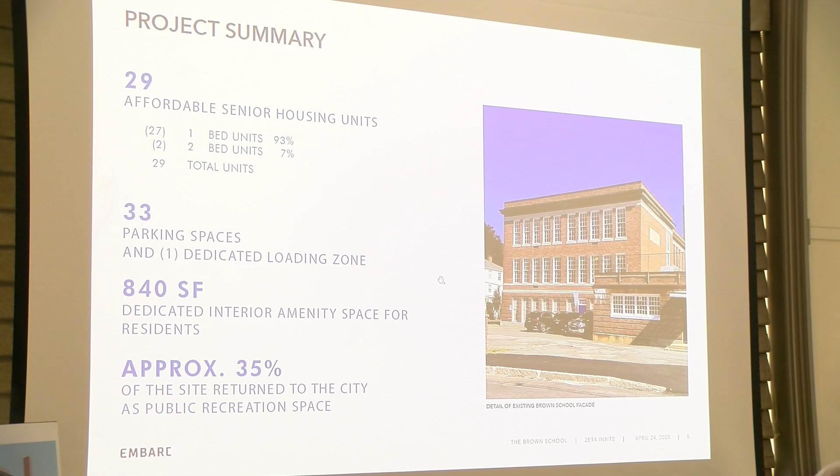So what we've done since January, you can go to the next slide. We're still at the Brown School. We still have 29 units of affordable housing, but what's changed is that we measured the building and we found that the building is smaller. So the unit mix is a little different. It's primarily one beds as opposed to the many two beds that we had in our initial proposal.

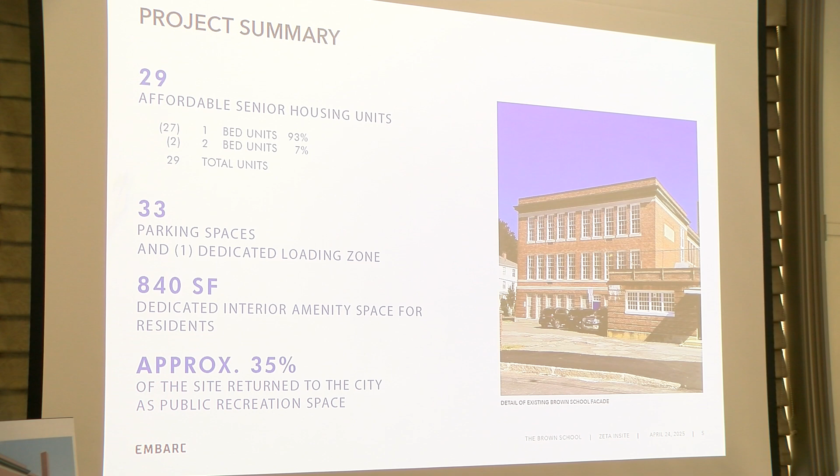And we're still providing the parking ratio that we heard loud and clear was really critical, one space per unit and a few extra. And we're still working very closely with Andy and the planning department to make sure that the site as a whole is an enhancement to the community, because it's sort of a puzzle and a sea of asphalt that really needed to be rethought. The existing amenities, the Article 97 elements, were sort of underutilized.

Parking was a bit of a mess. So since then, we've really kind of taken a big picture look and refined all of those elements. But in terms of what everybody is probably wondering, like, why does it take these guys so long? Well, I wanted to take a minute or two to walk you through what we're going

through. So we have to, first of all, comply with historic tax credit syndication guidelines through the National Park Service and through Mass Historic. We submitted applications for those tax credits, and the good news is we got approved in record time, which means that hopefully we'll get some allocations this year. Historic tax credits are allocated on a quarterly basis, so they have to be accrued. And that drives the timeline, because until we've accrued 60%, the Executive Office of Housing and Livable Communities will not fund our project.

So when you think about when are these guys going to start, it's still a couple of years out, and it's a sliding process a little bit. But the great news is that we're already seeing some really positive feedback, and everything is heading in the right direction. Also, since we met with you, the Affordable Housing Trust allocated $450,000 in support of the project, which is critical because for us to syndicate this through the Low-Income Housing Tax Credit Program, that program requires a local match. And that puts us in a very good position to show that the city supports this project.

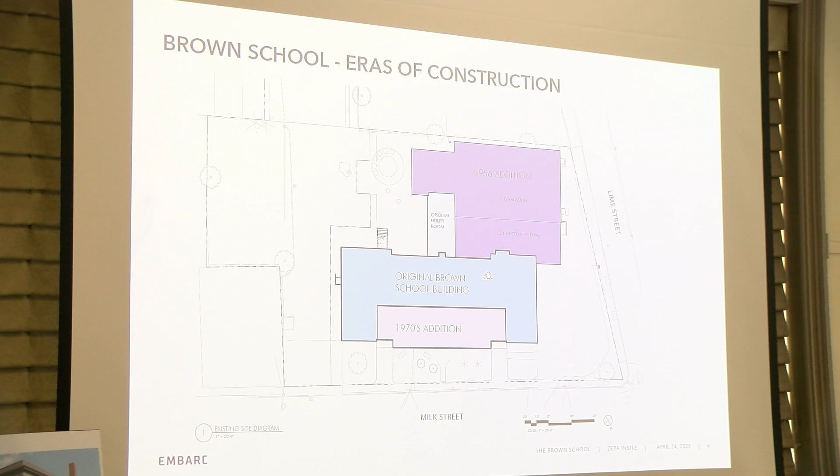And I'm Dan Briggs with Embarc. We're the architects on the project, so excited to take you through some of the details of what we've been working on. I'm going to quickly breeze through the next few slides, but this really just goes through the different eras that the school was constructed in. So really, we're focusing on the original Brown School building from 1924, as well as the 1970s addition. And we're working with the city to remove the 1956 addition and that connector piece here.

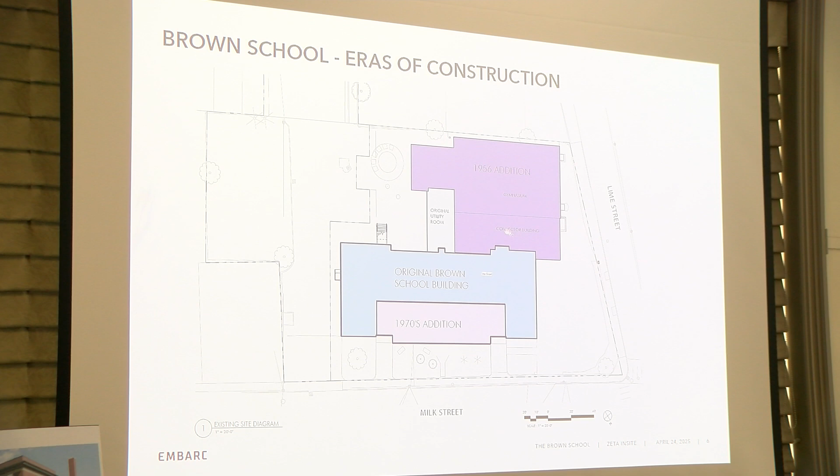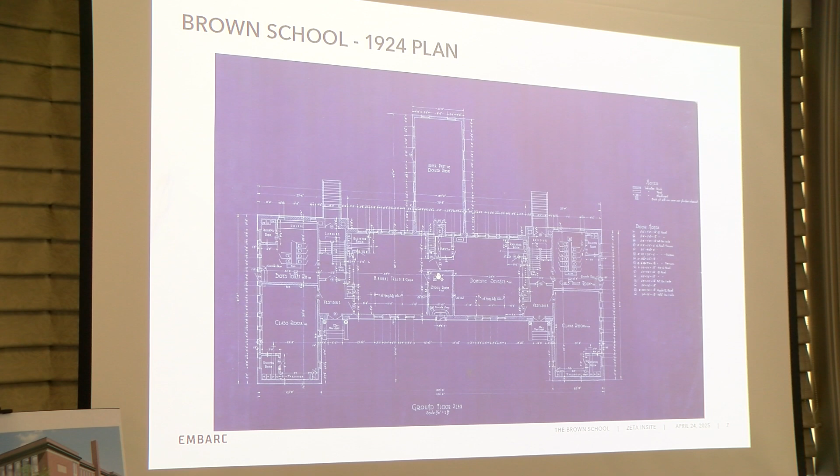As I mentioned, we have a wealth of great historic information and plans, both from the city of Newburyport as well as from PAL, our historic consultant, that really helped give us a great idea of the different pieces and components of the building. So this is the 1924, the 1956, '74, and now continuing forward into this next era, we've been working collaboratively with the city on the demolition part, making sure that everything that happens jives with our final building product.

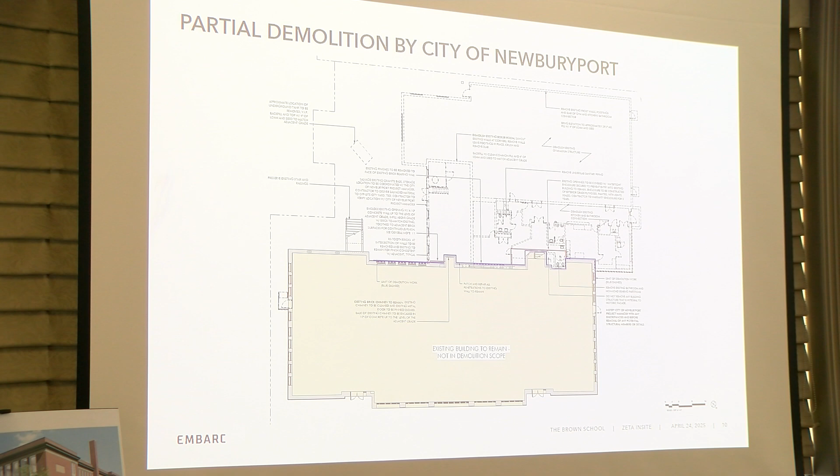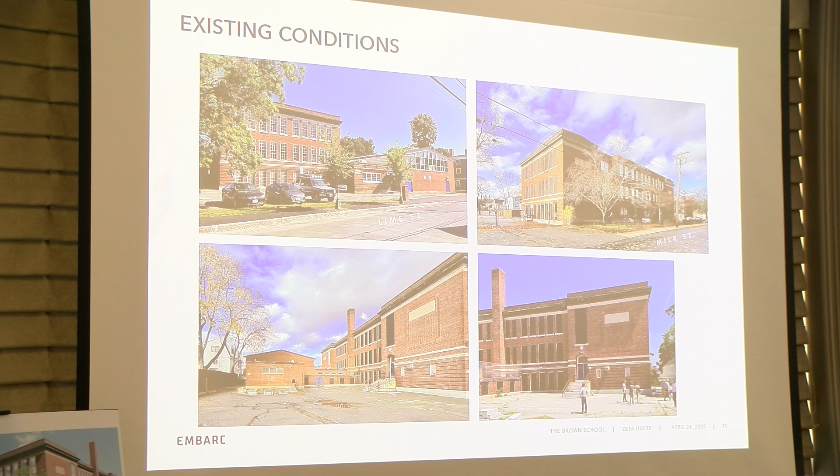You can see also just the extent of asphalt in some of these areas of the rear of the site and the sides, and a really exciting opportunity to bring some green back to the project as well. And some of the existing windows from 1974 that we're replacing on that side.

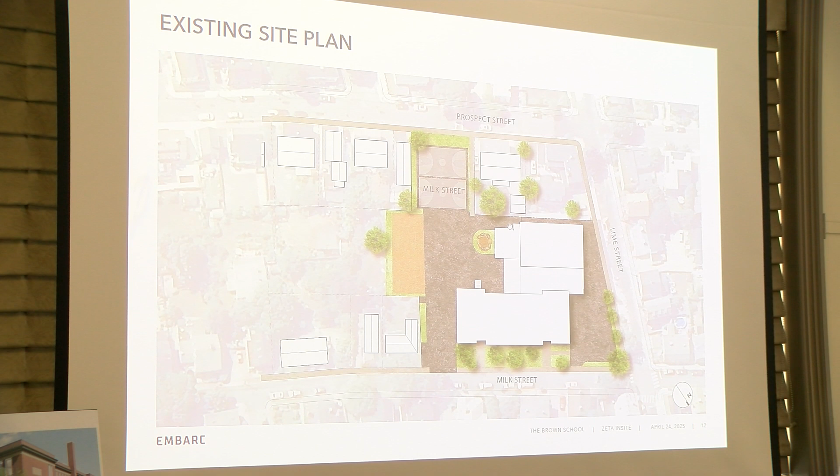So as Zena mentioned, the existing site plan is really a lot of asphalt and a lot of different curb cuts, and sort of these two isolated play areas at the back of the site. So it's just an amazing opportunity for this neighborhood especially. And we're really excited to bring this to life.

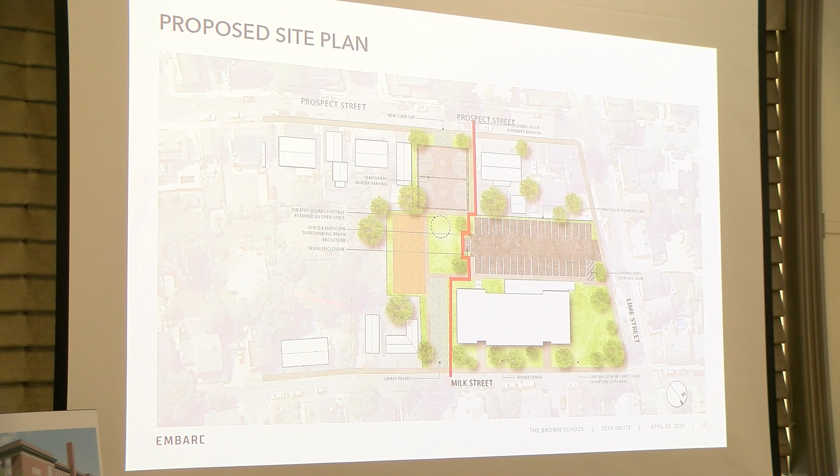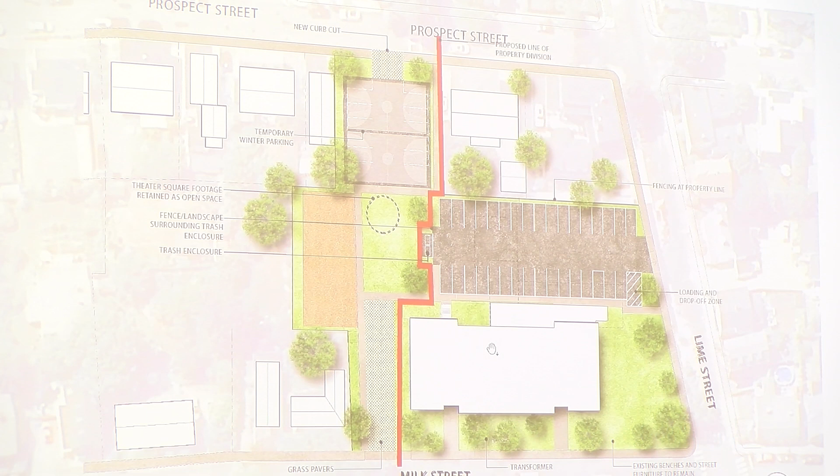Obviously, as I'm sure has been discussed, giving back this section of the site to the city, greening that up, creating a lot more connectivity through sidewalk connections and those green pathways, really consolidating the different curb cuts on the site so it's much more organized. There's one clear entrance and exit off of Lime Street, and bringing in a lot of new landscaping throughout the site, especially at this corner of Lime Street and Milk Street. Here, really surrounding the building with greenery.

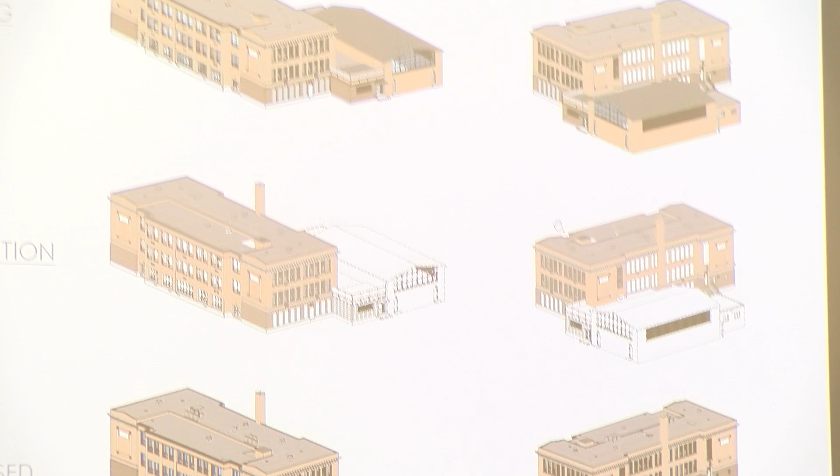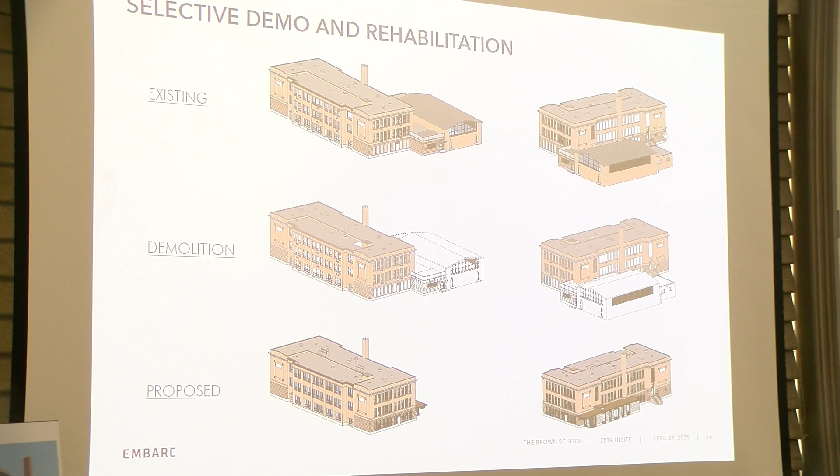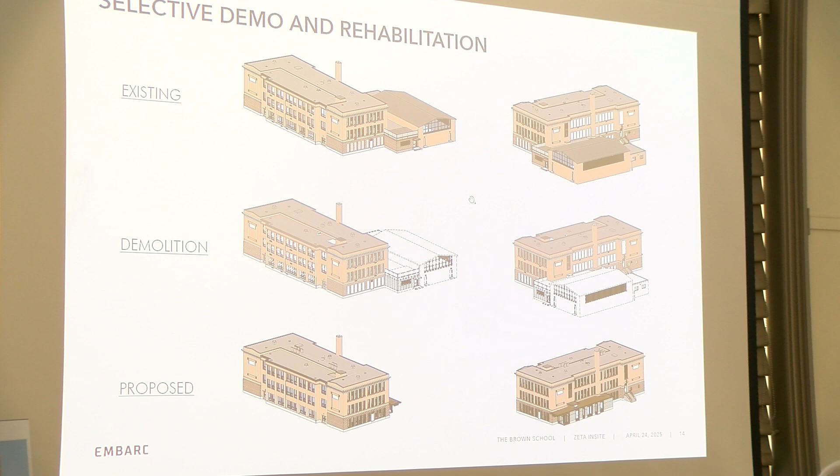This is a three-dimensional series of drawings that show from two angles the existing, what we're planning for that demolition process, and then what that proposed building will be. So as you can see at the top, the gym and the connector piece, as well as the boiler room here, and then the removal of that section, and really recreating a new entrance off of the back side along Lime on the side. We'll show you more images of that with some context to help locate it.

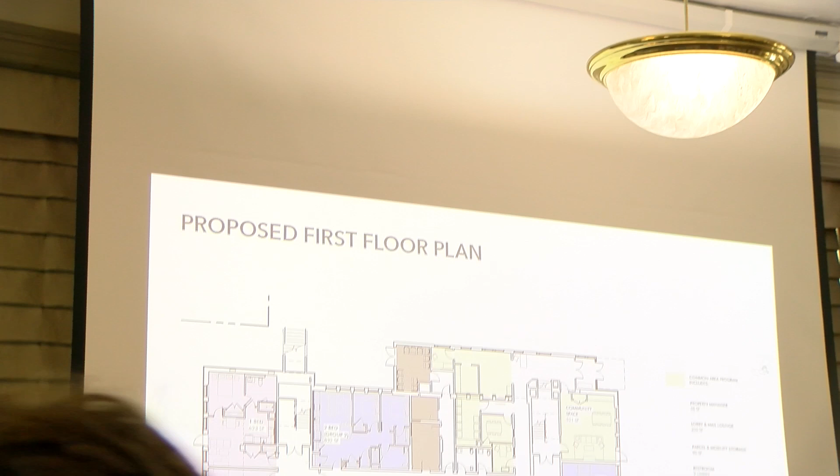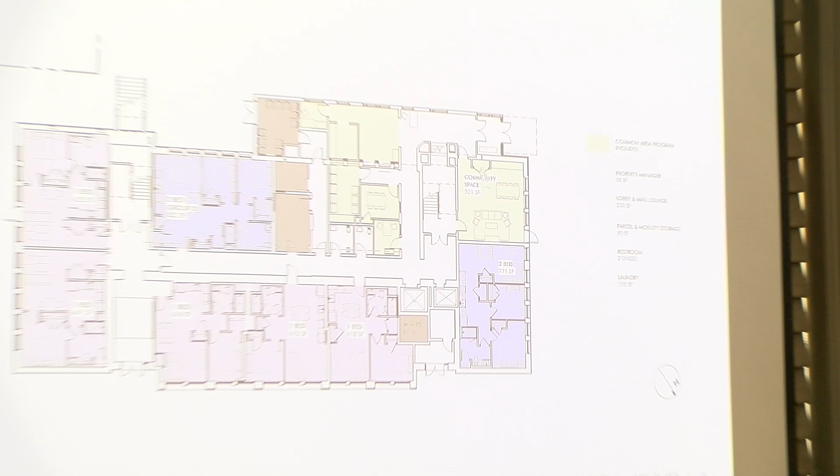Just going through the building plans quickly. So the proposed first floor plan shows this new connection that we're creating that corresponds to Lime Street. It creates a new accessible entry to the project and gives us a chance to create some amenity spaces as well and management and leasing areas. So everything in this kind of tan color that you see here would be those amenity and support programs for the building, really clustering those around the entry, trying to create a variety of different community spaces and spaces that residents can use. And utilizing the old area of the boiler room for where our utilities and sort of back of house components will go.

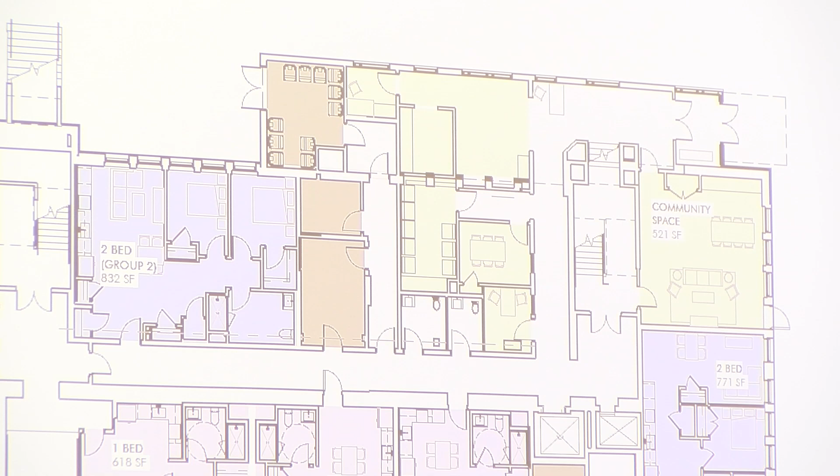And throughout the building, really, our intention for the actual units themselves is to recreate as many of the old classroom spaces as we can to maintain those, and to sort of maintain the character of those spaces throughout the building to the greatest extent that we can.

So moving up to the second floor, this is really identical to the third floor. You can see again here, just trying to maintain a lot of these existing partition walls, like that is the space of an existing classroom that we're maintaining. The idea is that you enter the unit and you can still get the sense of what that space looked like when it was a classroom, same ceiling heights, same window widths, a lot of the same appearance and the same flooring, things like that. And as Cindy mentioned, we have 27 one-bedroom units and two two-bedroom units for a total of 29 units in the project.

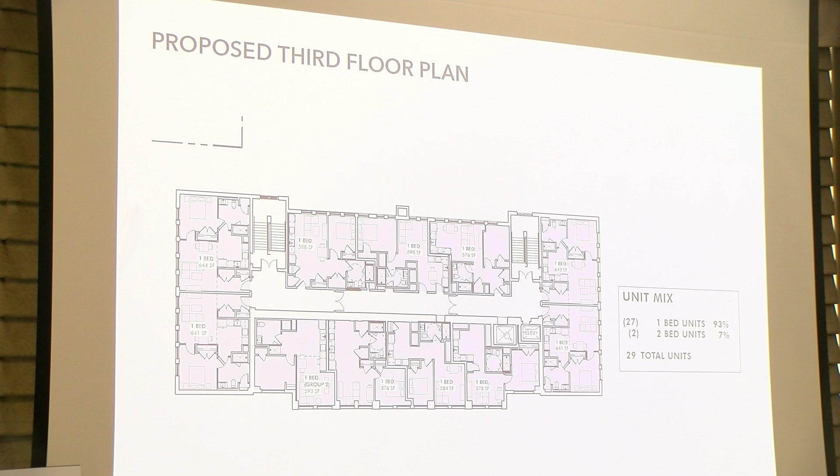And again, the third floor is the same. We have two elevators, so we are actually adding an elevator to the project. It's a great component for the demographic. It's also a requirement of a lot of the funding that we're receiving.

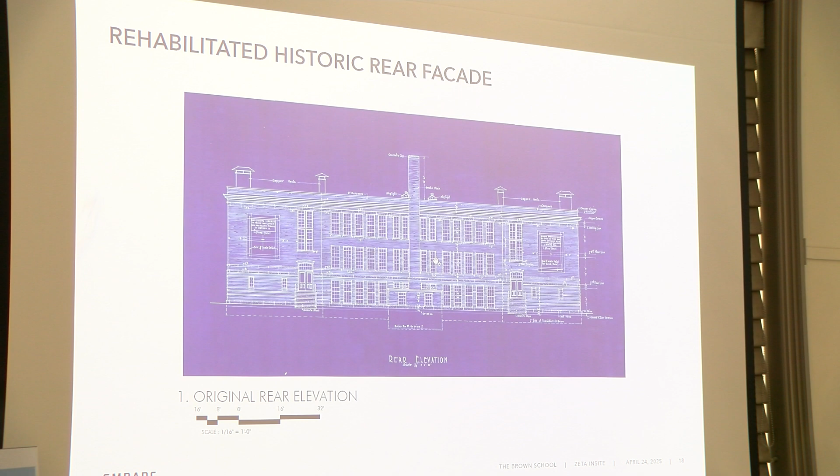This is a really exciting series of slides that is really looking at that rear facade of the Brown School. This is from the 1924 drawing set, the original hand-drawn blueprints. And all of them are really immaculate facades. And the ability to really bring visibility back to this for neighbors and for the neighborhood. So this is what it looks like now with the gymnasium and the connector piece. And this is where we'd like to really be able to open that up and create those views where you can experience again the historic facade of the Brown School.

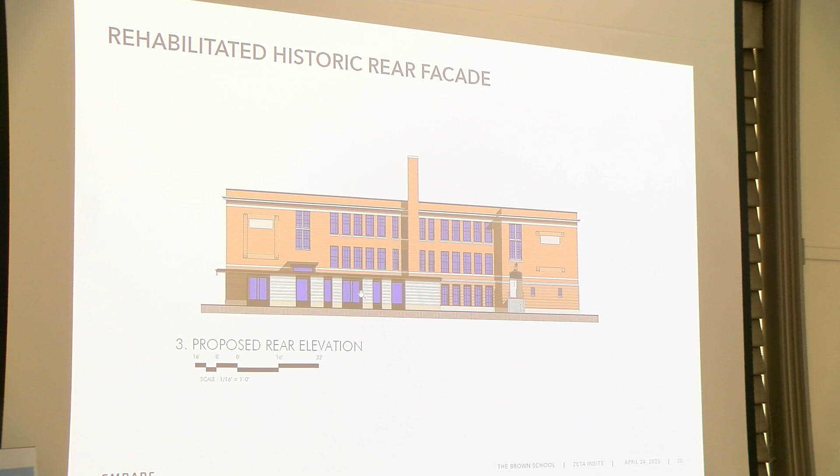And then working through architecturally, we've designed a contemporary style of addition there that's meant to tie in with that existing base. You can see all these lines, we're really trying to tie that in aesthetically to the existing building, but not to try to compete with it or pretend that it was original, but to show that it is clearly an addition to the building.

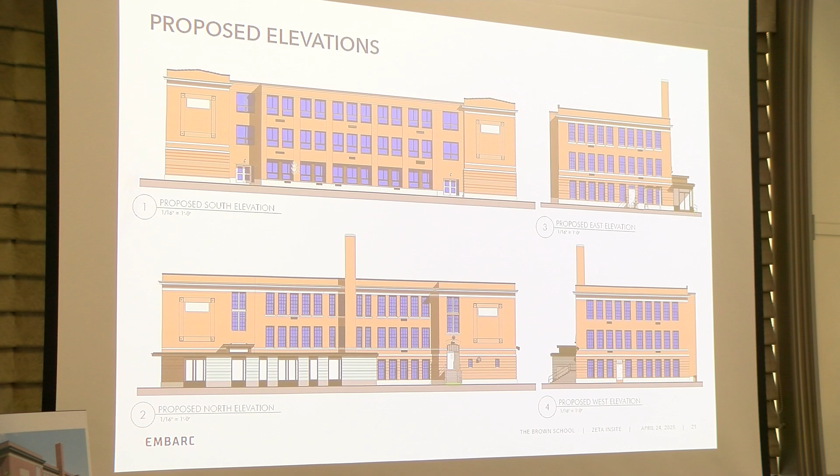So again, looking at all of the elevations here, really excited to see this building with those windows open. And on the Mill Street side, redoing the windows there to have a better residential proportion, make them operable, just make them really conducive to apartment living.

We're paying a lot of attention to the existing features of the building. As Sana mentioned, there's a lot of stakeholders in the project. We have historic, we have the low-income tax credits, and we're working with all of those stakeholders to make sure that we can hit all of the requirements they have, but also to maintain as much of the historic character of the building, the inside and the outside, as I possibly can.

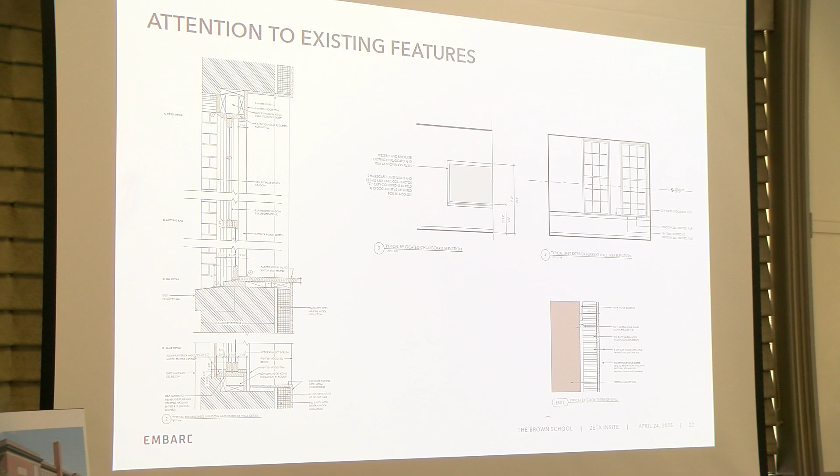And that includes preserving as many of the blackboards, the old historic chalkboards, that we can, and reintroducing them in living spaces in places where it's appropriate to have those within the classroom itself. Keeping a lot of the historic trim on the interior of the unit as well, and again, refurbishing those existing windows that are absolutely gorgeous.

Along with that, just to go back quickly if I can, we're also introducing new insulation to the building to help the thermal performance so that it's really comfortable year-round for all the residents and also reducing utility costs year-round.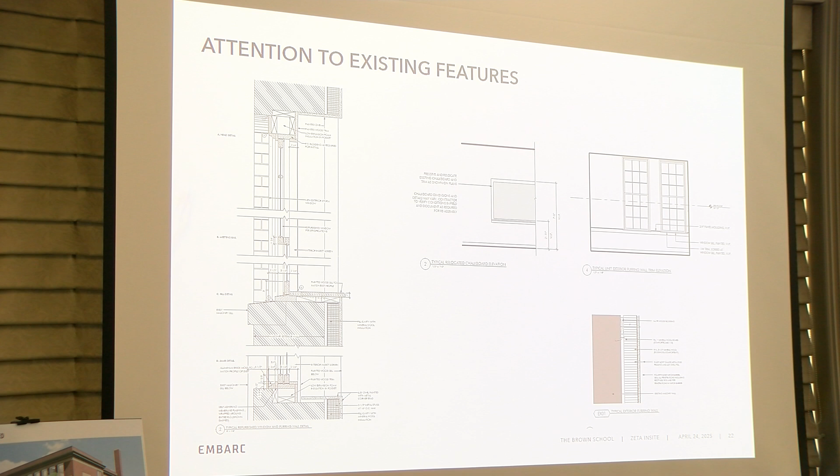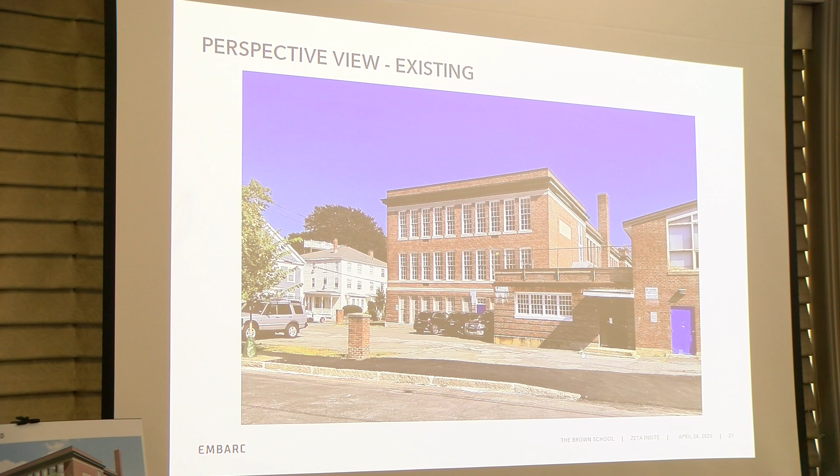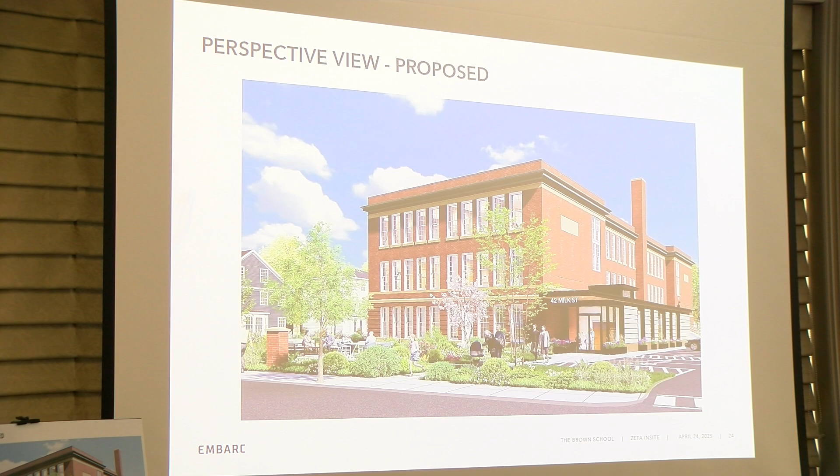So just a quick series looking at the building from Lime Street, so existing facade here, the gymnasium, and really excited about the ability to bring in new landscaping, new outdoor amenity spaces for residents, and to create that connective piece that sort of ties it all together. I'm just gonna jump in and say, absolutely. The entrance that Dan designed is really key because it offers a line of sight for anyone who is waiting for a ride. The parking allows for a spot for a minibus to pull in if we have shared rides to the grocery store or to the senior center.

So this was a really great way to pull a piece of the building out. It's sort of like a surgical operation where you take off the boiler room and the connector building where the kitchen used to be and then the gymnasium. But then you also bring this element that pulls it together because we do have to deal with a portion of the building that's missing.

And to Dan's credit, he thought about removing some of the existing base stones around the boiler room and reusing them, which we requested Andy, as he oversees the demolition, to preserve for us. But it really is, we don't make buildings like this anymore. A lot of this is really spending a lot of time taking care of what's already there and restoring it. And it can be quite elaborate.

Most of the windows are actually in good condition, so they are deemed reusable. But it's quite an extensive process to send them out and bring them back in. And they will be hard to operate. Some of the windows are being replaced, for example, on the 1975 addition on the other side, because we also need to have egress compliance. Yeah, there's an egress component to that, so making sure life safety is taken care of with the new window.

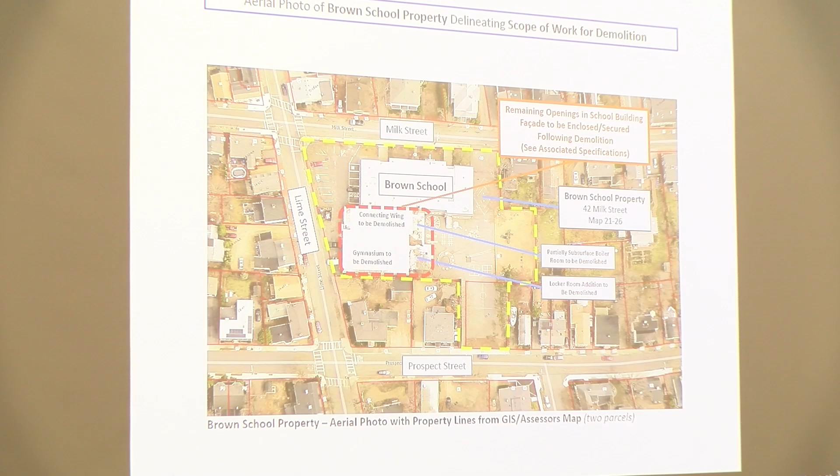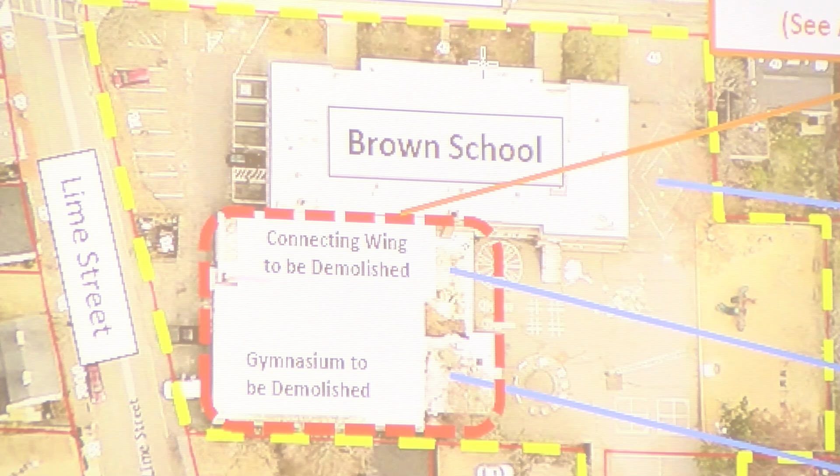I'm actually going to use my photo here. The Brown School building will be preserved, as they were just talking about. But all of this here, the gym and what I refer to as the interstitial space, and the boiler room, which is this piece right here, and then the locker room area, all of that will be demolished.

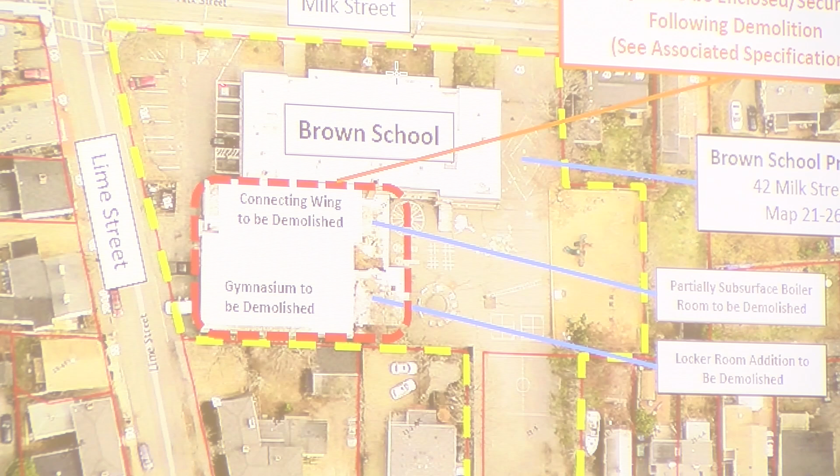There is a close proximity here, so I've already been talking with some of the abutters here, and we'll continue that discussion as we get closer to the construction. There'll be some good coordination along the fence line and tree line there to protect all that. The parking area here will be displaced temporarily. During the construction, we need to give the contractor good access.

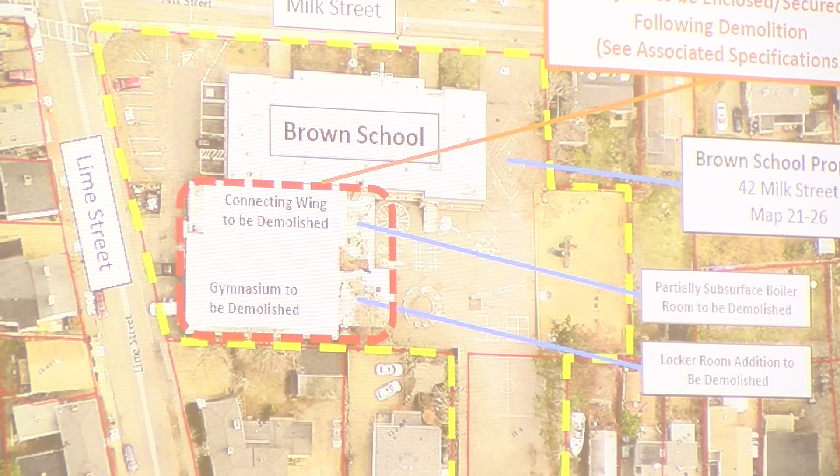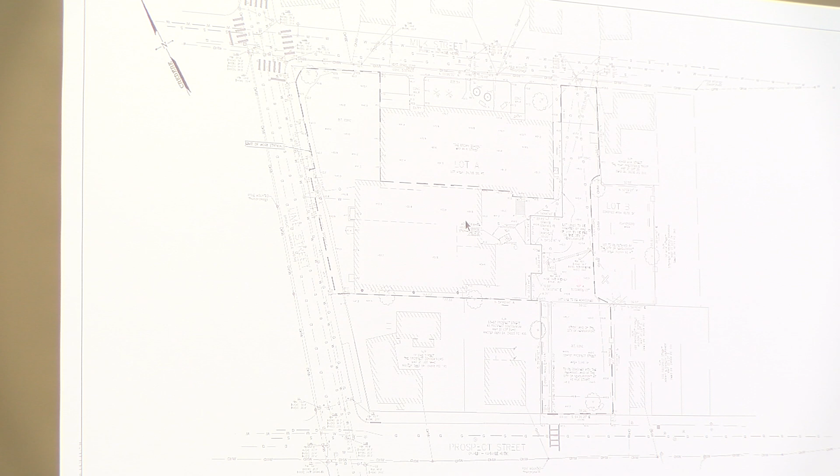These next three drawings are just from the construction set that we've given to the contractors. They have a whole bunch of specifications they have to follow, but just to give you an idea, this is the existing site, so the overall parcel, including the two that the city owns here, the original school building, and then the addition pieces that we're demolishing.

The piece that we're retaining, the park piece that I mentioned, the Parks Commission is looking a little bit further into in terms of future improvements. We're looking to align that with the developer's work for the school building. Because they are going to need access and we're going to need access, to make sure that we're not disturbing things once we put them in, it makes sense that we tie those things together and coordinate them.

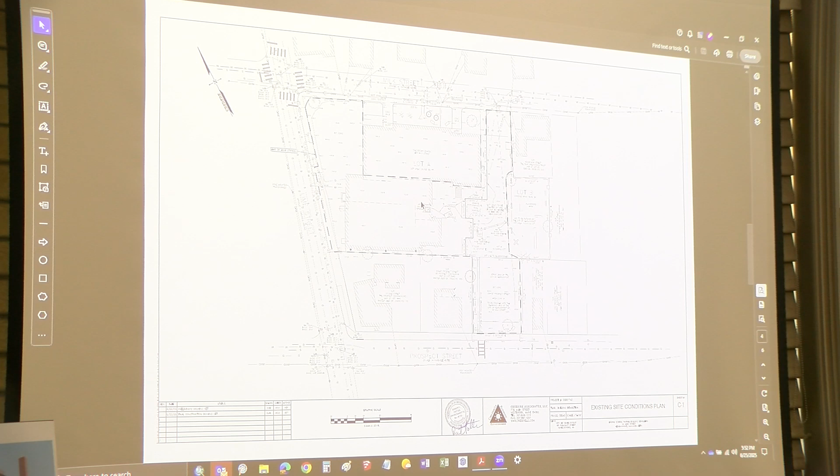So any improvements to that area following this work are not the subject of this presentation, but there will be some improvements to this area, including that asphalt area back there, the playground and the courts. But for now, the contractor will need access to those areas. So they will be establishing construction fencing around the outside of the site. As you can see here, they'll be making sure that these gates are closed as they're coming in here and getting access on the back as well.

They'll be protecting the staircase to the original school building. And then basically in this area here, they'll do some patchwork of asphalt. They'll be stubbing utilities before the work starts. We don't know the exact timing of this work, just to clarify. July 10th, the bids are due from contractors, so we'll be seeing after that, hopefully get good prices,

and enter into a contract. I think a realistic timeline for this, based on the things we usually see, including contract execution, exchanging insurance documents, seeing things we call submittals, and getting them mobilized out there, is probably an August, September timeframe. We can update our project page on the website, and give you a better idea once we know who the contractor is and we've talked with them about those details.

But generally speaking, they will be closing out those utilities. They won't really be doing work on the original school building, except on the backside, where, as Dan mentioned, we're trying to protect as much of that building as possible. So in essence, they'll be required to follow certain specifications to close openings in the building and weatherproof them for any duration of time in between, until the team here comes back and does the work on the original windows and openings on the original school building.

So they will have access to the entire site in that area. When they are finished, we will have them leave a chain link fence around this area here. There'll be some additional work and probably some further investigation we'll do for stormwater management and the future parking area and whatnot, working with Zeta and Mark and their team.

But we will close off this area here just for clarity and security of that area. This will be loamed and seeded, so just grass essentially placed in here. The parking area will reopen, and we'll be able to reopen this area as well. There'll be a little bit of restoration work here. Again, this will not be the future park condition, but the contractor's restoration to previous condition, essentially asphalt when they do. And we'll coordinate on the park side any sort of improvements, of course.

But what they will do also is leave a fence along that line as well. So again, the primary impacts that we're going to be seeing is when they're putting up the construction fencing, we'll have to close off those areas, and so anybody who's parking in that area will be temporarily displaced. That will open up again when we're done. We're talking about a matter of weeks, so probably like a 6-week period. We're going to try to compact this with the contract. It'll be a matter of details with them, but generally speaking, they will be the front part of that.

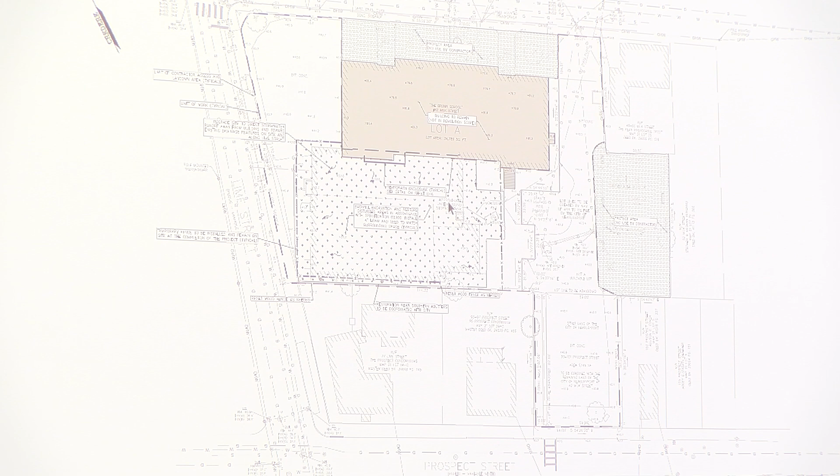You will see them come to the site, but they'll probably be doing most of their work inside, and that's because they have to do the hazmat remediation. So things like removal of a little bit of lead in the building, a little bit of the PCBs caulking around windows, and primarily things like asbestos tiles or wrapping around the pipes. Most of that is going to be found in the boiler room area. And so what we'll actually see when they get out there is their initial time frame, and a lot of work actually will be just taking care of and cleaning up all that stuff, getting it ready to go.

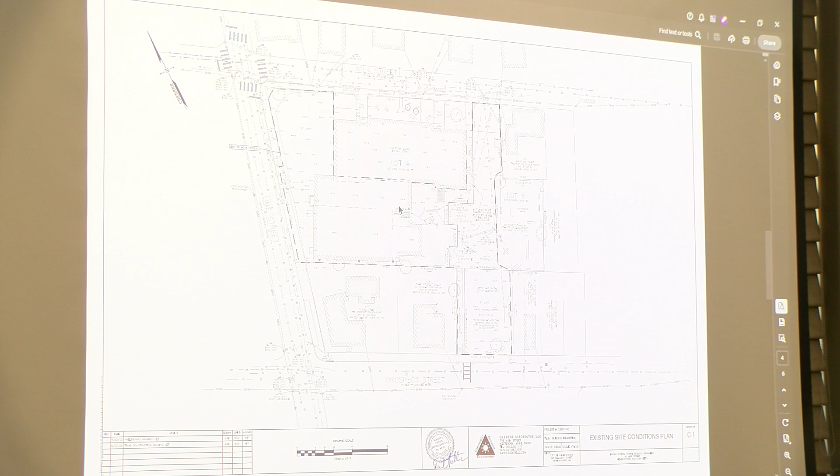When they bring down the building, that's probably going to be a day or two of relatively quick work. But we'll also have to see them having to ship the materials off-site. So they do have a whole series of protocols they have to follow for all those materials, DEP protocols from the state. We have a licensed site professional and a consultant that deals with hazardous building materials. They will be overseeing the work with us. There's a series of submittals that have to be done, documentation of where the materials were disposed of, and so forth. So all these protocols have to be followed for that work.

They also have a pest control requirement, so things like rodents and bats and whatnot. The contractor has to submit a plan for that and follow certain specifications and protocols to address those things prior to the work itself. So there'll be a series of things that we have to review in documentation from the contractor before they're actually out there doing the work, and that's why we add a little bit of time after contract execution before they're really mobilized and doing work. But the first work we'll do is the hazmat work. The tail of the work is really bringing the building down and then getting it out of there. And like I said, what will be left is temporarily a grass area in the middle there. That's briefly what's going to be happening.

The timeline's a little bit clearer once we know who the contractor is, but with that, I think we mainly wanted to see if anybody has any questions for us that we can clarify.

Yes. I'm glad you brought up the hazmat because other projects we've done, we've uncovered more. Yes. And it becomes very expensive. Are we putting a contingency in place for that? And are we sure the asbestos is limited to, I mean, I know it's in the boiler room, and PCBs on the windows, as you said, but have we done enough of an assessment? Are we waiting for the contractor to do that? Yes, that's a great question.

We've done a good amount of assessment, actually. As you know, every project is a little different as to how much information you have at any given point. But in this one, we actually have done a fair amount of previous studies. So we have what we call a phase 1 study and a phase 2 study where they actually do some testing in the building. And so we have a pretty good idea of where those materials are. Some of that is called out in more detail for the contractors. There's a whole series of reports and documentation related to this stuff that's made available for them as well. So we have a relatively decent assessment of those things.

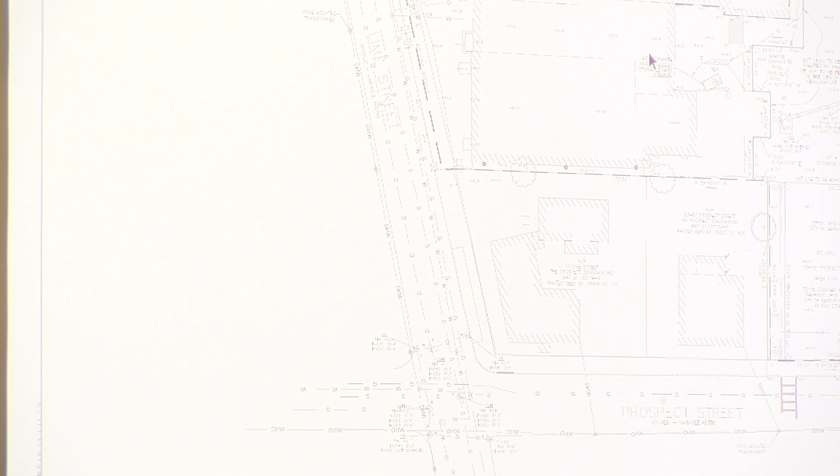Right here in the front. Andy, just to clarify, so when the demolition phase happens, which is going to be soon, pretty much the whole area will have the chain link fencing around it. Yeah, again, we're relying upon the existing fencing here and here, of course, but yes, around this area here, which is close to it. And then you said that's maybe like 6 weeks. Again, estimate, ballpark, right? Again, trying to work to compact the schedule, a lot of that's in there, in the building. Give or take, yeah.

But then after that's done, the chain link fencing is going to go away except around the site that was taken down? Correct, so this area will reopen as you're seeing it today. And then the chain link, or whatever fencing, will be around the demolished area, which is the former gym. Correct. Until this project gets started, which could be in a few years, is that what I heard? It's dependent on that schedule. There may be other reasons for us to come in and do a little bit of testing here and there. For instance, putting stormwater management over the parking, we might get some soil information, things like that, a little deeper.

But yes, that's generally it. Okay, so it'd be nicer to have the smallest area with the chain link around it, if it's a few years before the project gets started in earnest. Understood, I keep thinking about that as well, and I know we'll be continuing to have conversation about that, and as we get going we may decide to make some adjustments. Again, it's partly dependent on schedule, and recognizing there might be an ability to minimize impact visually, but recognizing that this area is going to be used for the future parking, so we don't want everybody to think that's going to be a parking area for residents now.

I don't think changing it, but just visually, if it's a few years away, how to minimize that. And then people can go back and park in the area that they're using now. Agreed. We'll have some further discussion about that. Thank you. Because I don't think I realized how far off this was, other than the demo. I didn't realize that it was maybe years away till the project got started. Understandable concern. We'll take a look at that. Okay, thank you. And I'm sorry, before I go there, there were one or two hands here.